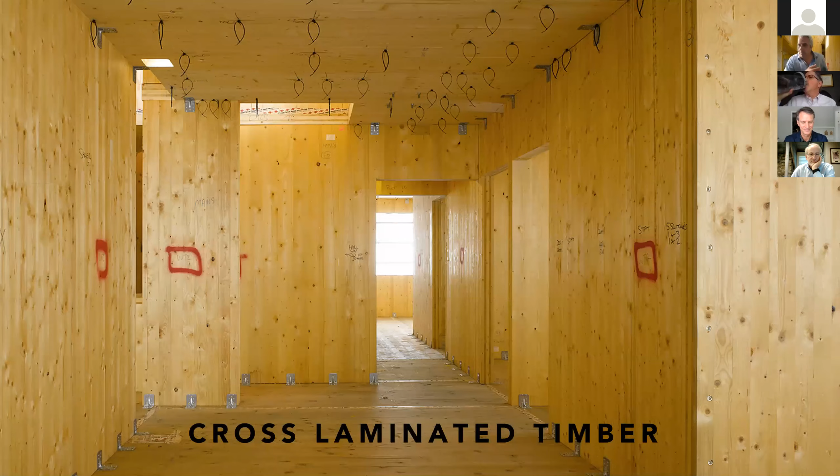We used to start with a slide like this, and thought we didn't have to do it anymore, but I realized, Dan, we've talked about it so much that we forget CLT is still very novel to a lot of people. So it does what it says on the tin: it's big boards of timber made up of planks laminated in perpendicular layers to create massive construction boards. You can see in my background a building under construction.

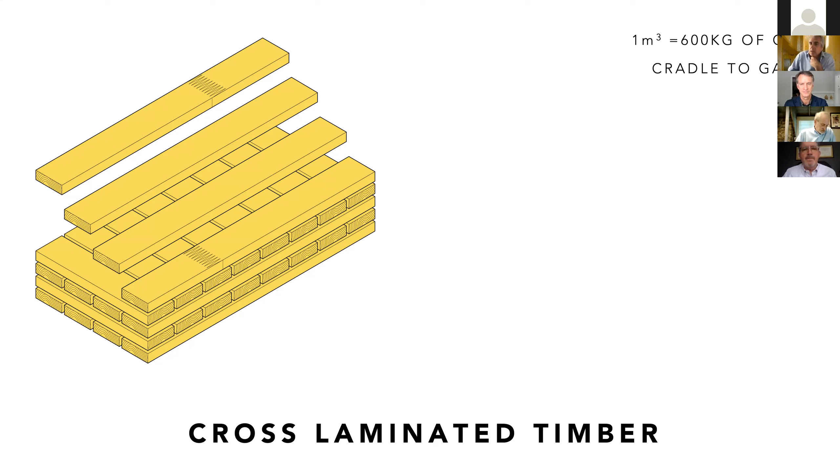And the point about it is every kilogram, every meter cubed that we use in construction, we're permanently storing 600 kilograms, a ton of CO2.

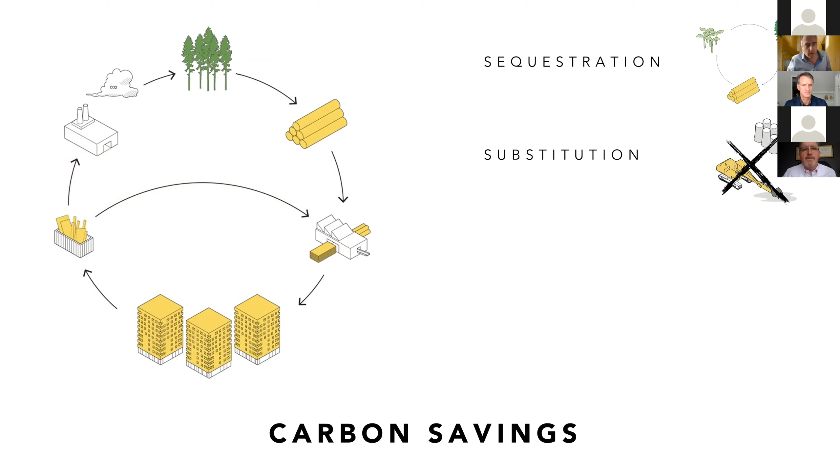This is the key driver for us: the triple carbon saving. We have the carbon absorbed during the growth of the timber, which is then harvested when the trees are matured, leaving space for more growth. It removes the need for concrete and steel, high polluting, high embodied energy materials, and more importantly, it actually drives reforestation, which most people acknowledge is one of the key ways we're going to address climate change.

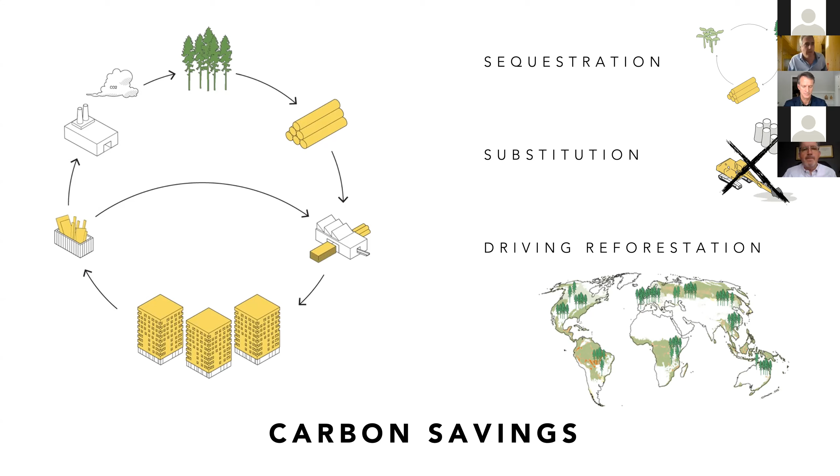A lot of the work that's been going on in buildings since the 1990s, when the issue of carbon emissions was first addressed globally in construction, has been on operational carbon, driving down the cost of heating, lighting, and cooling. But only very recently have we started to talk about embodied carbon, the carbon based in the structure.

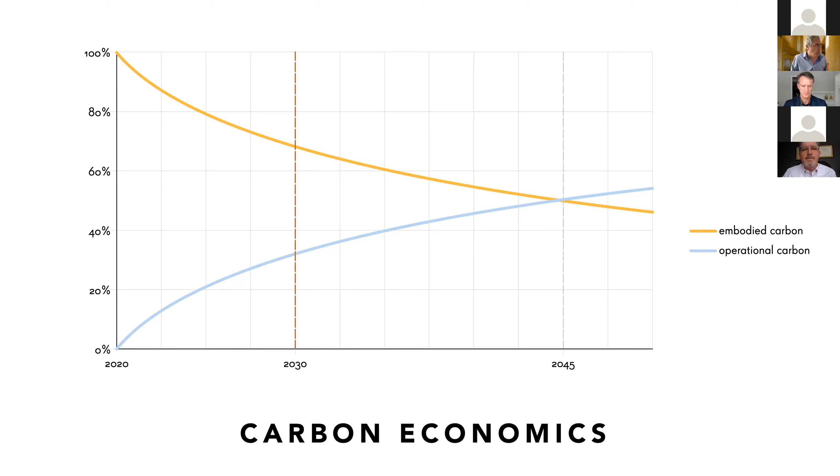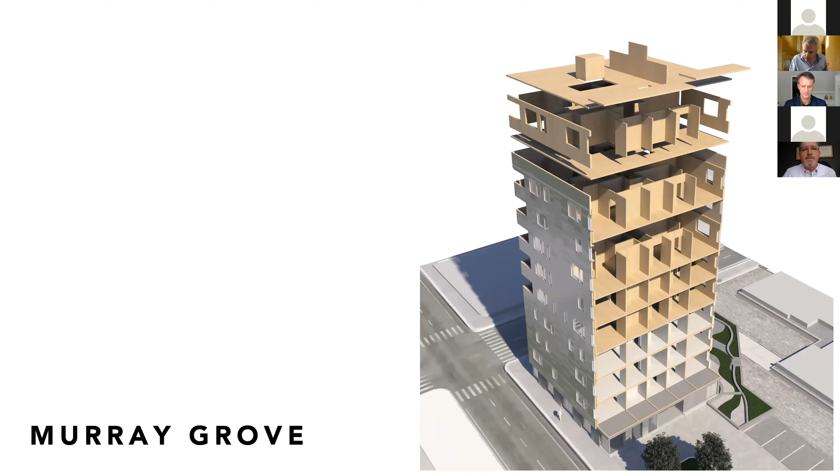As Dan said in my introduction, we stood our first CLT building in 2003, but our key work was Murray Grove, built in 2008-2009, which is the world's first tall timber building at 9 stories. The entire structure and external walls, lift cores, all constructed from CLT. This moved the material from being a niche product for schools and low-rise buildings into something that could compete globally with concrete and steel for high-density urban buildings.

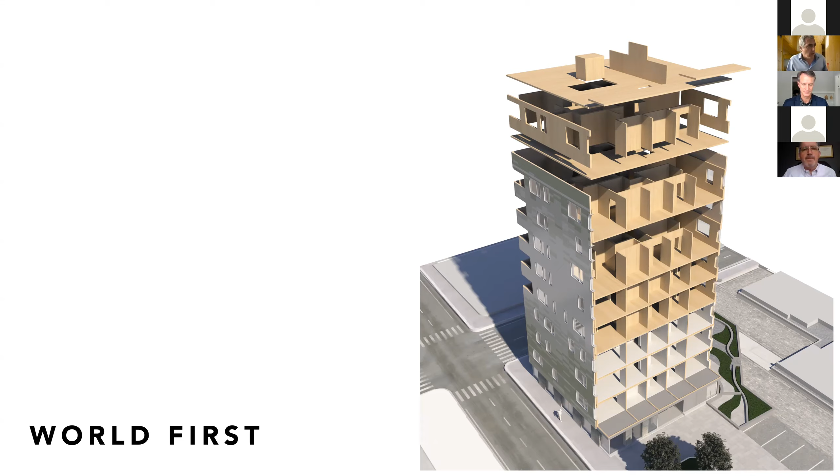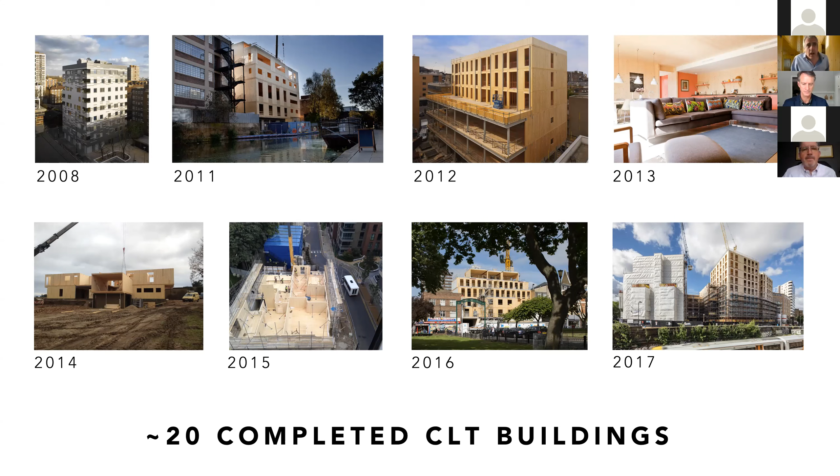Within the last 10, 12 years, we've completed about 20 other buildings of varying scales, and now have about 20 more which are at various stages on the drawing board.

We also proselytize about our work. We published a book immediately on completion of the Murray Grove project, showing how we did it, giving away all our trade secrets and the research we'd almost bankrupted ourselves making. We were paid a standard fee for the project. The only way we could convince our client to do this revolutionary building was to say we wouldn't charge him a penny more, but we probably spent about 3 times the amount of time we would have done on a traditional concrete frame solution.

More recently, a couple of years ago, we published a book of 100 projects in the UK, only 7 of which were ours, as a global marketing tool for cross-laminated timber to demonstrate its move into the mainstream. It shows a very wide array of buildings, building types and scales, and includes many top names in architecture, development and construction within the UK. In fact, this was funded by the US Department of Agriculture, the Softwood Lumber Board, in order to help promote CLT in the US. So, talking about the drivers, why we're moving towards CLT, what's been going on.

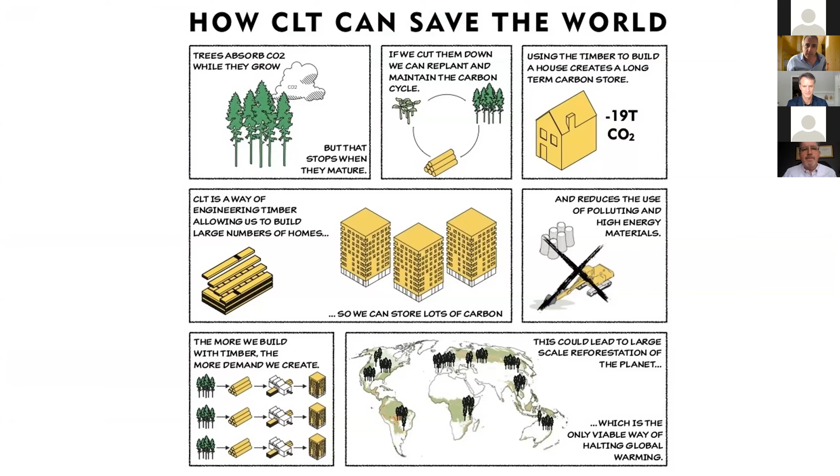One of the interesting things for us is the way we've managed to get our clients to use cross-laminated timber and become accidental eco-warriors, really by showing them the commercial benefits. In fact, the developer client for our first building, Murray Grove, said to us, 'I don't give a toss about the environment. You can build it out of rubber bands if you like, as long as it's cheaper and quicker, I'll do it.' And this is the point for us.

We've lectured a lot in the States. France is very big, it has a lot of political pressure to move towards timber building, but there's a real reluctance because in the end, and I'm not a great capitalist at heart, but in the end the financial imperative has been what's driven the adoption in the UK.

With Murray Grove, we were able to demonstrate that we could build it in two-thirds of the time. We could build it for the same price. We could use less foundations.

This building, which we completed 2 years ago, not far from the Murray Grove building, is directly above an underground railway tunnel, which meant we couldn't use concrete piles. We had to use a raft foundation, and as a result, the lightness, the reduced weight of the CLT meant we could build a 10-story building, whereas the engineers had told us in concrete that would only be 7. So our developer client got 121 units instead of something like 83. That was the argument we used for them. Again, not interested in any of the environmental benefits, it was the quicker, cheaper, more that won it for them.

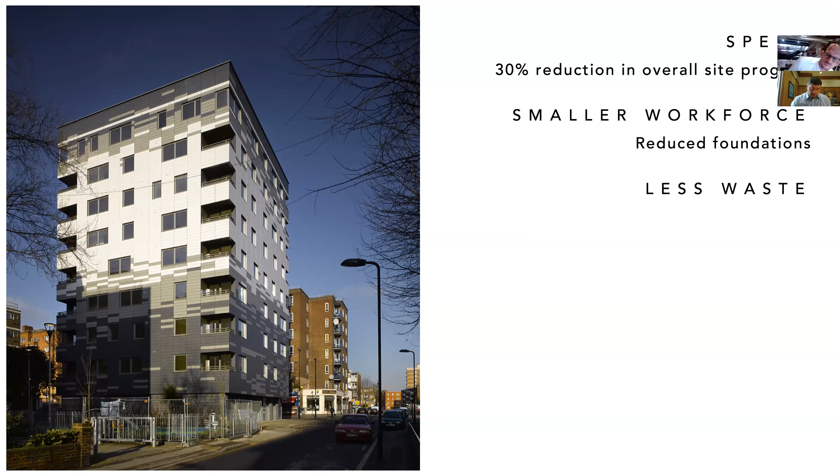This is the reason why a lot of our clients will use the material. But one of the other key drivers we're very excited about, which particularly plays into our post-COVID world, is health and well-being, which we were already talking about before the pandemic, and now becomes right at the top of the agenda.

In the aftermath of the Spanish flu, the emergence of the Bauhaus and modernism were things that were already brewing, but were kick-started by this need for clean lines and a new understanding of how disease is caused, and that it's much easier to clean in simple, clean, crisp surfaces.

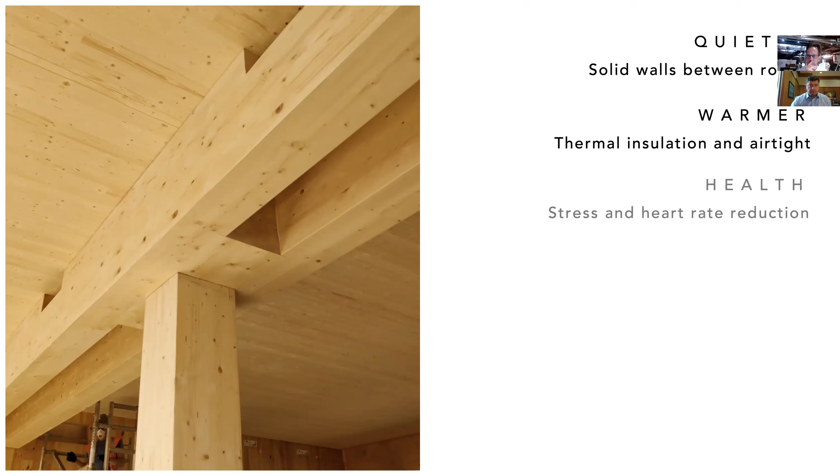Again, it's more subtle. We understand more about medical issues anyway, but that health and well-being, the biophilia, the need for natural materials — we're getting more and more understanding of the benefits of living and working in timber, in terms of lower heart rates, better health, and less stress.

I won't go through all of this, but the slides will be distributed afterwards, and you can see that all of these points show now that there's lower absenteeism in offices. Health outcomes in hospitals which have a large amount of timber in them are much better. We have people recover quicker, with less lying in bed recovery time. In schools, there's less stress.

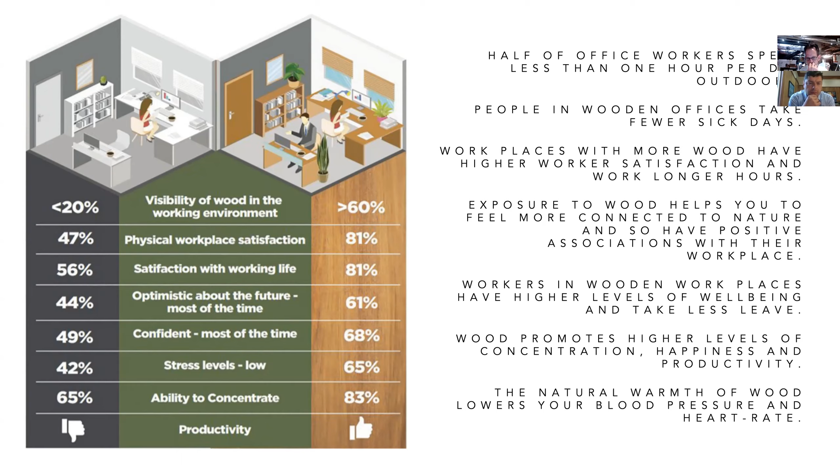There's a school near our office in Hackney that we didn't build, but was built in CLT for autistic children, and the head has said that the behavior of the children is remarkably improved by the timber structure. So this is the point I was making before.

We are now at the point of a fundamental change, and CLT and mass timber construction is very well placed to move in with all the other drivers and satisfy these needs for natural materials and cleaner, more healthy workspaces.

And for us, the real excitement is going back to the title of my slide, which was that we're talking about a construction revolution. What is the next stage? I mean, timber, or mass timber, is very much at its infancy.

Much like concrete was 100 years ago. Concrete was, of course, an ancient material used by the Romans. The new reinforcing techniques suddenly opened up a whole new field of structural possibilities. Initially, the use of it was very bespoke, and there was no consensus on any way in which you could build. Reinforcing was done with square bars, oval bars, round bars — there was no standardization, and we're now moving into that standardization. My practice is very keen to be leading that charge.

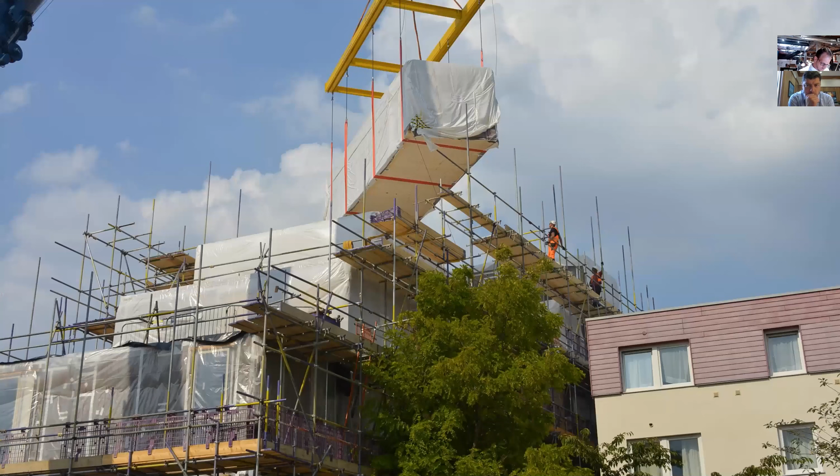Housing, modular housing, is a way of taking more of the delivery of housing into factories, to improve quality and improve cost control. Cross-laminated timber is a very good vehicle for that, because it's very rigid, very simple to construct, and very lightweight. We're just finishing our first mass apartment building using these timber boxes. We can't see inside at the moment, but they're completely pre-finished inside with wall finishes, etc.

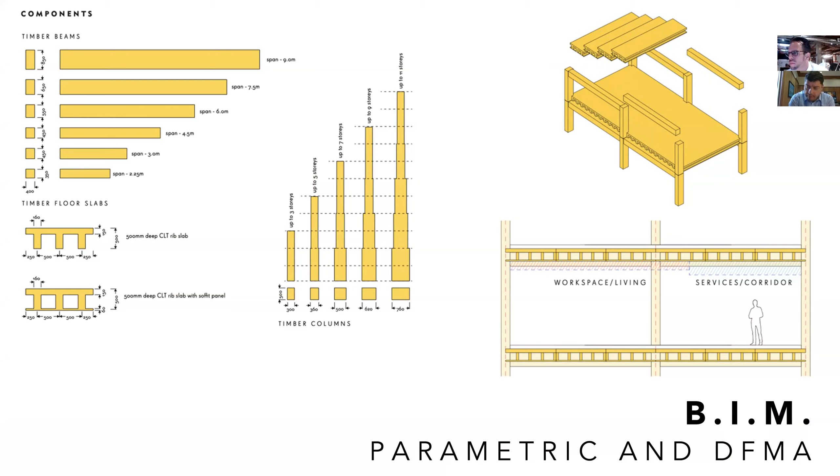And we're now moving more to building systems, actually developing — we've got 3 or 4 projects where we're developing suites of components that can be used to create building systems for the very swift erection of timber offices and timber residential buildings. These are some of the projects that are now on our drawing board.

This is an office very close to our own office, built entirely from timber. The local planning authority allowed two extra stories because of the benefits of CLT, in terms of the carbon sequestration that was offered.

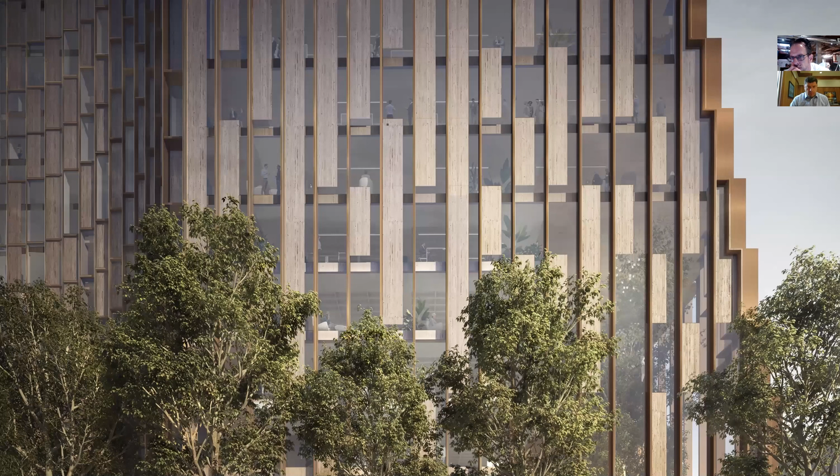We're now looking at cladding systems using timber. This is a project I'll explain more about after this slide. We now have in New York, and in a lot of world cities, concrete buildings of the 50s and 60s are now reaching the end of their life. The cost of demolition for large numbers of these is almost unthinkable, and the cost of completely refurbishing them is not necessarily justified by the capital value or the revenue value of the asset after refurbishment.

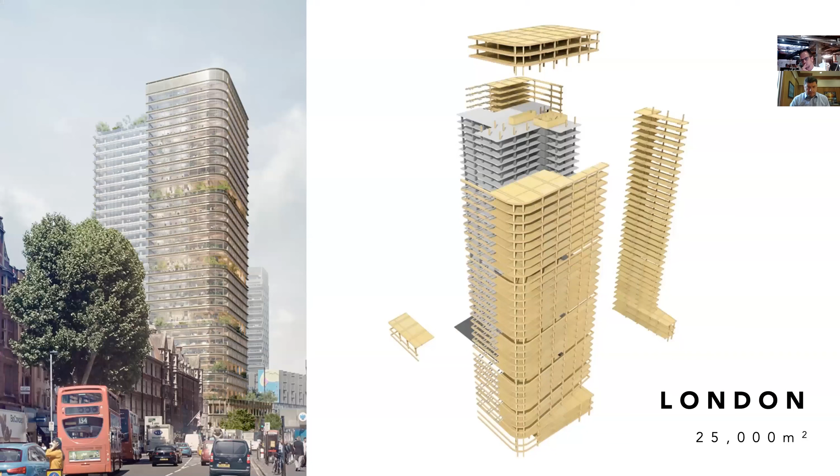So one of the projects we've been working on is a 1960s end-of-life tower in London, the Euston Tower at the top of Tottenham Court Road. We're completely remodeling the building using timber, expanding it both vertically and externally to create a more contemporary form, adding substantially to the floor space, which justifies the expense of the complete refurbishment and eliminates the need for demolition.

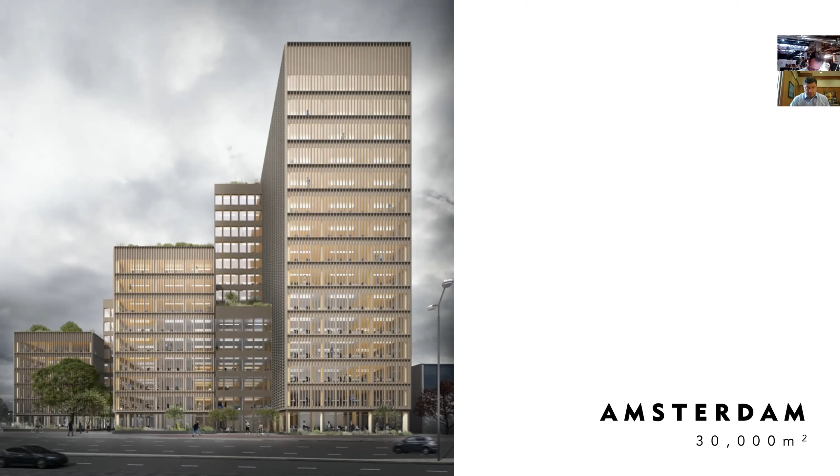I think that as an exemplar project, it's something that should be exported globally to similar buildings. This is a similar project we're doing in Amsterdam at a much earlier stage, and in Milan for Lend-Lease, a building system entirely devised for assembly. This is a component-based office system we're now producing, 100,000 square meters, effectively 1 million square feet. And at the end, this is another project up in Bergen, housing built on a lake in Norway.

I'll finish with a Latin quote. Unfortunately our current Prime Minister, who I'm not a big fan of, often quotes Latin. I'm not trying to emulate him, but this is something said by Cicero in 44 BC.

I think it speaks for itself. I know I've spoken quite fast, I've tried to fit a lot into my 20 minutes. I hope I haven't overshot.

I think that's it. Yeah, excellent job staying on time. Thank you. So I'm not sure how I unshare now. Pause share or? I think you just hit it. Right, sorry, on there, the, we go, top. I'm sorry. Yeah, there we go. Thank you.

Thank you, Anthony, it was excellent. We already have some questions, but we're going to first move to Howard and get a local take on his perspective and his experience with Georgia Tech.

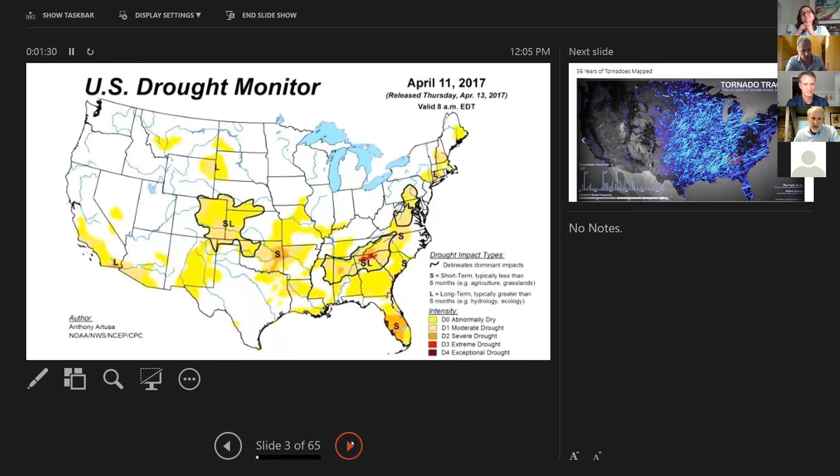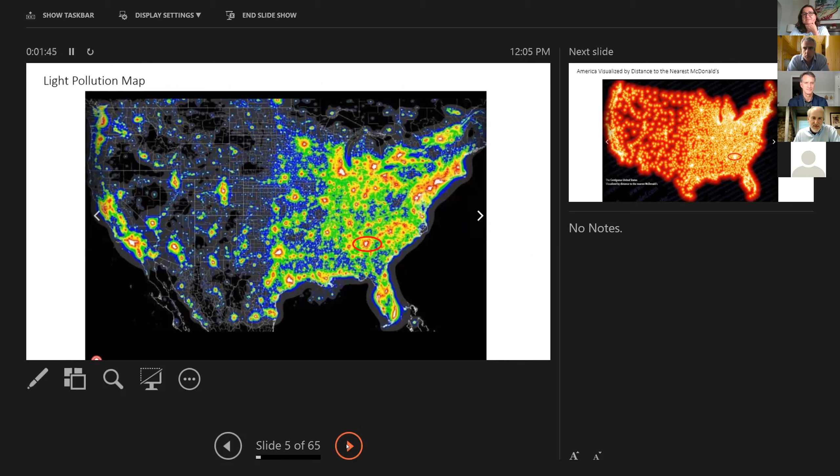So I'm looking at it from a campus development perspective. Anthony, a couple of these slides are to show you where Atlanta, Georgia is. We're in southeastern United States, there's Florida down there, and we have drought issues, issues related to climate—drought is a big issue in Atlanta. We have tornadoes, we have light pollution. Atlanta being a metropolitan area, you can see that hot spot there. And apparently there are a lot of McDonald's in Atlanta and other major cities—it's really quite amazing.

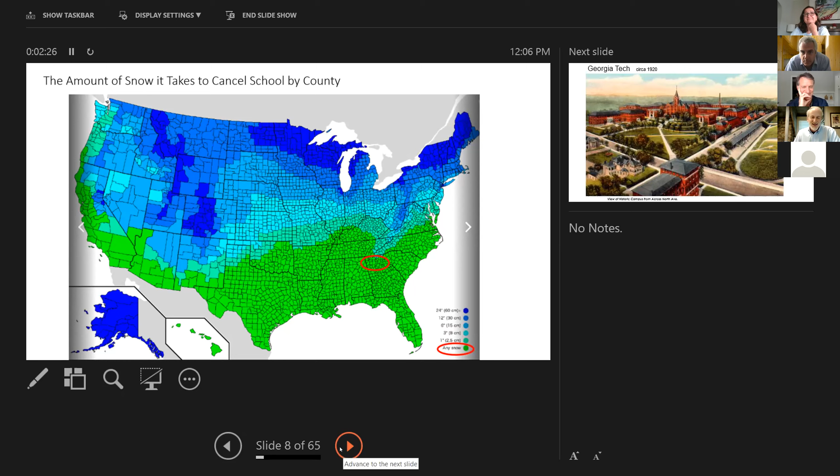As context, Georgia is a relatively happy state. We're not as happy as Montana or Wyoming, but we're more happy than other places. And then occasionally we get snow in the green zones, here's Atlanta. So any type of snow, schools are canceled. Just a little context for everybody.

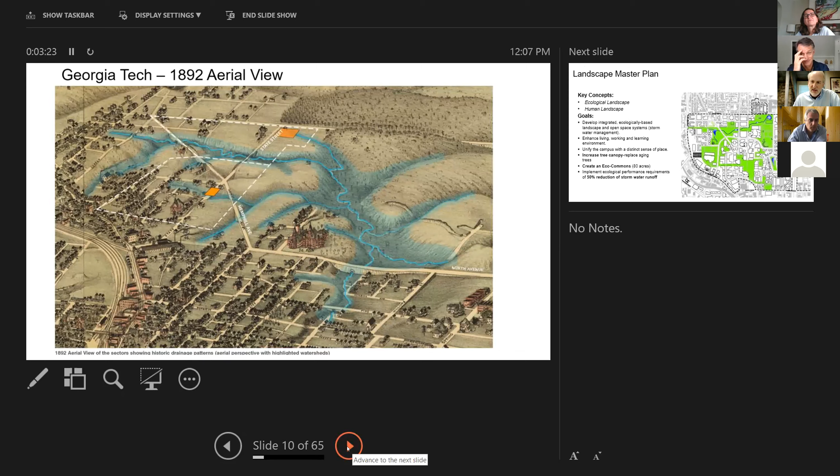These streams over time got buried in concrete pipes as development occurred on campus. When I was at Georgia Tech, we had a campus master plan, but also a standalone landscape master plan focused on the ecological and human landscapes. We created this green donut we called the Eco Commons, about 80 acres out of the campus's 400 acres. You begin to see these little blue lines where those buried streams become visible again.

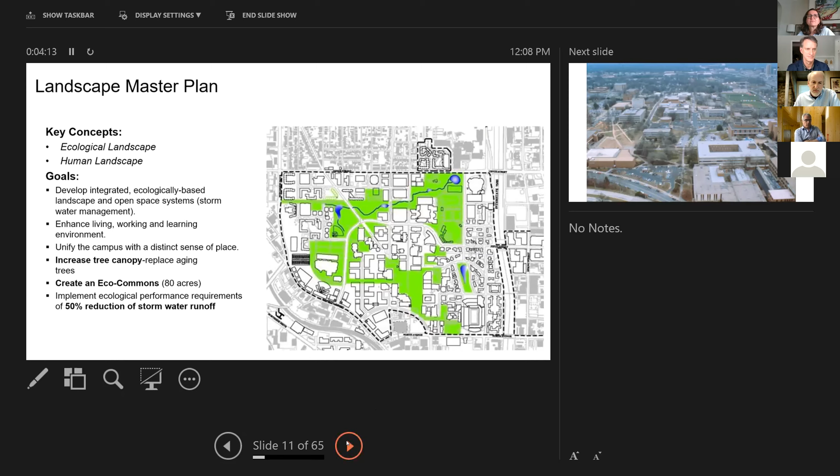In Atlanta, we have combined sewer systems, so sanitary and stormwater are all combined. It has to get treated offsite, and then it comes back out of the faucet. So how do we reduce our demand on potable water for non-potable needs, and how do we protect the river, if you will?

When I arrived at Georgia Tech, probably not too dissimilar from a lot of campuses that evolved over time, the heart of campus was asphalt. Bill and I were in grad school together, and you could park in front of any building you wanted to on campus. That wasn't really a good thing. So we revisioned what the campus could be.

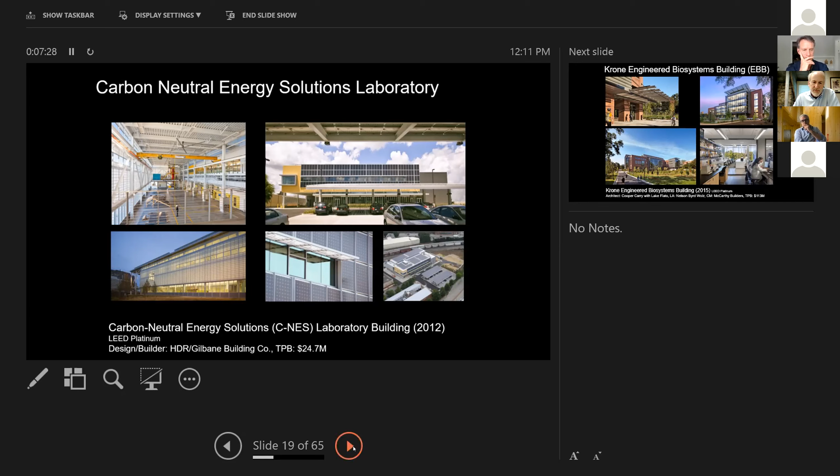Cold. I've got a cup of coffee over here if you like it. I already drink coffee, thank you. Andrew, you may want to put yourself on mute.

We developed this temporary forest in the front of the building. It's a future building site. Those trees were recently transplanted, and I'll show you where in just a moment. We replanted some new trees in that location, but access to natural light is really important.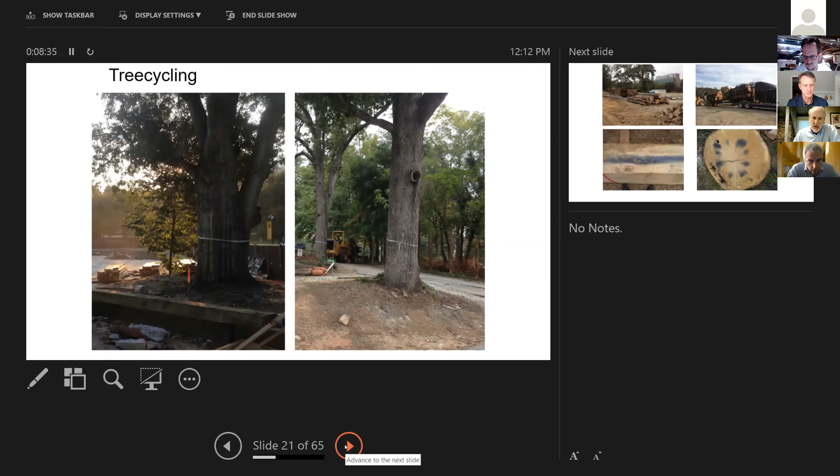One of the things that happens when you do development is sometimes you have to lose some trees. I started a tree cycling program, not only with this site but all over campus, with fallen trees through storm or disease, and had a stockpile of trees. I had some public policy students write a policy for the campus on how to tree cycle. Previously, all these trees would just get turned into wood chips and mulch, but what we did was cut down these trees, mill them, and they became the stair treads and benches in this 5-story building. So now the building tells a story about its sense of place.

Which sort of leads us to the living building at Georgia Tech. The Living Building Challenge was started by the International Living Future Institute. The whole notion behind the living building is using the metaphor of a flower and what would nature do. So it's regenerative, beautiful, it harvests all its own energy and water, it's pollution free. That's sort of the goal of the Living Building Challenge.

We were fortunate to get a gift from the Kendeda Fund of $30 million. 25 was to build the building, and another 5 once it got certified, for programming over the next 5 years. But the notion was to transform the building industry in the Southeast.

Up to this time, there were only 12 full living building certified buildings in the United States, and they were either in the Pacific Northwest or the Northeast, but not in a hot, humid climate like Atlanta. So the Kendeda Fund was looking for a partner and felt that Georgia Tech, as a habitual builder deeply committed to sustainability, would be a great partner to engage with.

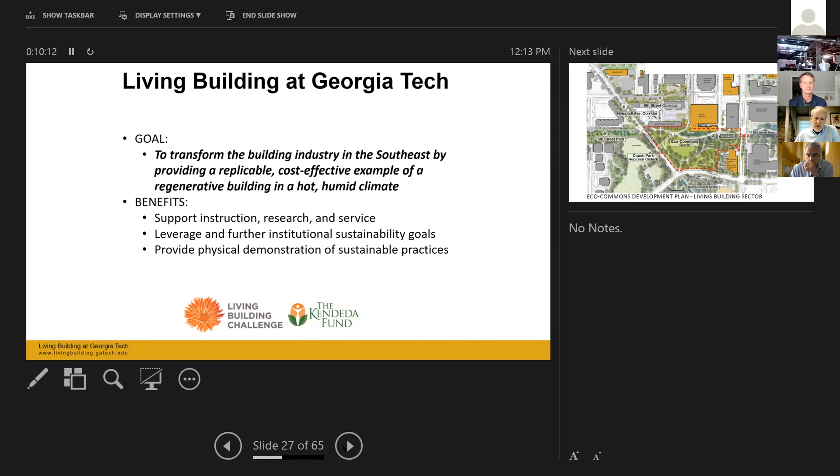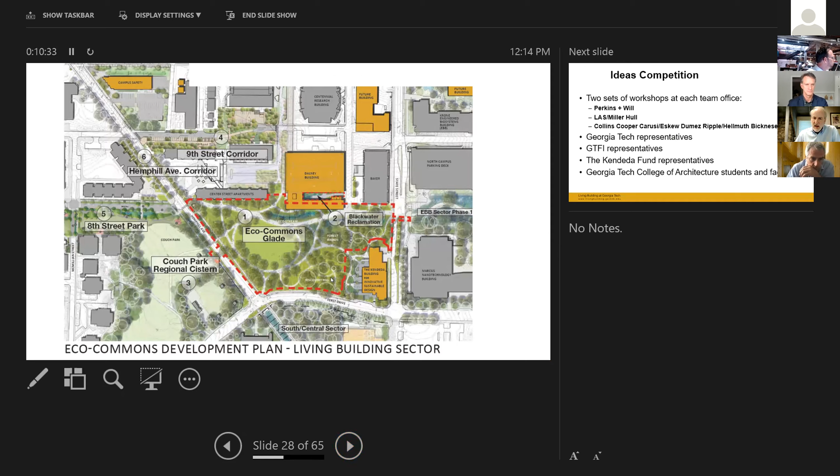So this building sits in a portion of campus that we've developed. I mentioned earlier about this Eco Commons, so this is a part of that. Here's the footprint of the living building, and you begin to see some blue lines in here, which are those waterways that are now engineered and brought forward. And we created this performance landscape.

But we had never done a living building before. We've done lots of LEED buildings, LEED Platinum buildings. So I did this ideas competition where we shortlisted 3 design teams, all of whom had members on their team who had done work on living buildings. We did an ideas competition. We had students involved. We had other representatives involved from Georgia Tech and from the donor.

And we set up these workshops over 2 days, 1 day per month over 2 months in each of the firm's offices. We wanted to see how they worked. We wanted to make sure the alpha dog architect wasn't dictating to the landscape architect or the structural engineer or the mechanical engineer or the civil engineer what is the right decision. It needed to be a very collaborative and integrated process.

And we just observed this process. We did not ask questions, nor did we answer questions, until after each round of these workshops, where we then provided written comments to all 3 teams. So we just embedded ourselves in their offices. And again, we had never done this, so we were on this learning journey as well.

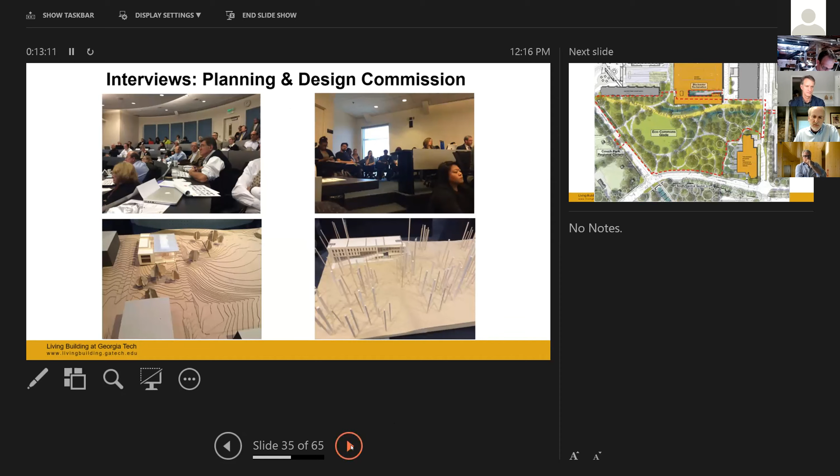But we have something at Georgia Tech called a Planning and Design Commission, which is an external advisory board that gets together once a quarter, and they're involved in the designer selection process and ongoing design review process. All of those students who were working on this project in their studio were all invited to observe the interviews, and they were all in those workshops. I know when I was in architecture school, I never got to sit in on an interview. And these students were the client to those firms. It was pretty powerful.

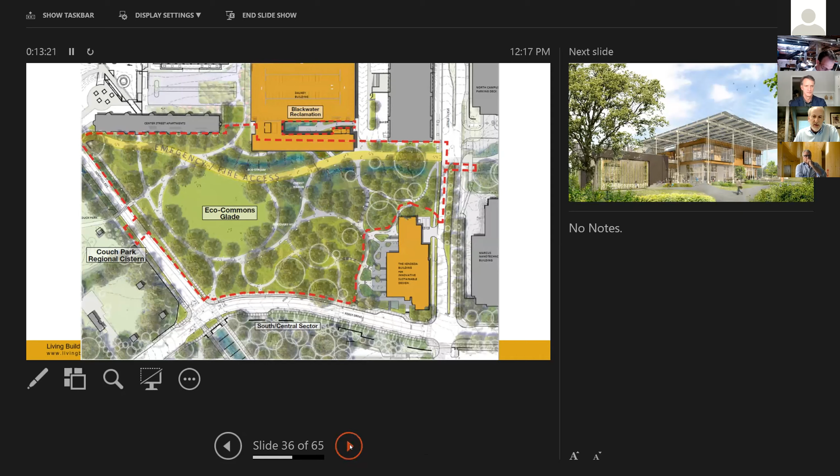So again, here we are. Here's this Eco Commons, this is about 8 acres. And here you see the Kendeda building right there. And just some visual eye candy that came out of this ideas competition and some renderings. Again, we needed to understand what the impact was.

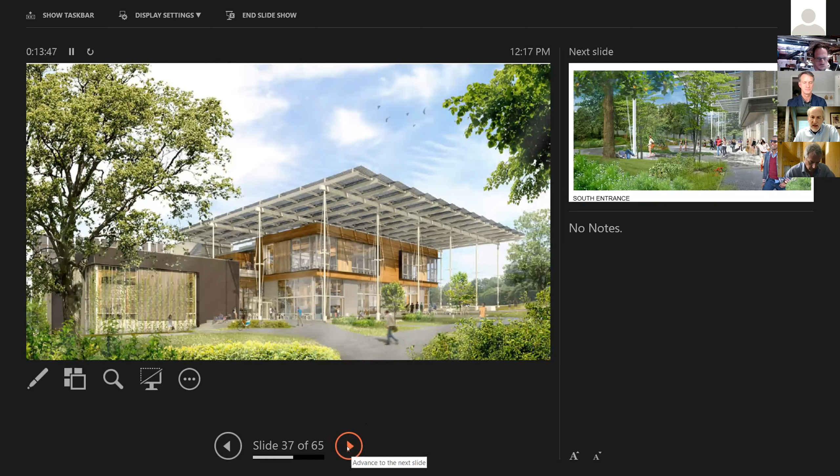This solar canopy provides all of the energy for the building, and it's net positive energy. The building is net positive water. And those are the requirements of complying with the Living Building Challenge. Some more renderings.

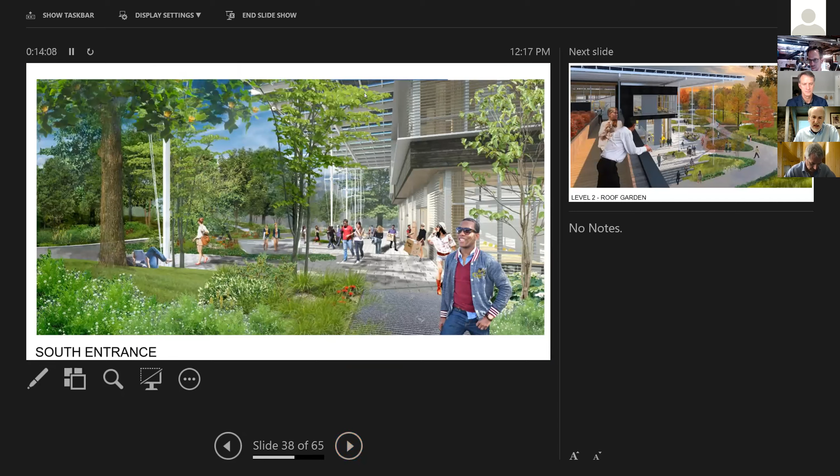In Atlanta, Georgia, having a west-facing porch isn't how you want to orient a building. We felt the orientation of this building to the Eco Commons was critically important. In the southeastern United States, porches are really communal spaces.

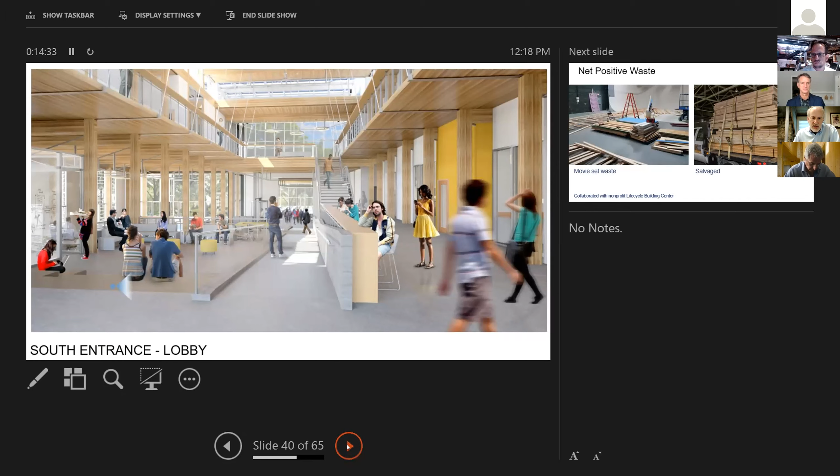In Georgia, the film industry is quite big, and normally these sets that are built, that material would just get thrown into the landfill. There's a nonprofit in Atlanta called the Lifecycle Building Center. We partnered with them to store this material for us.

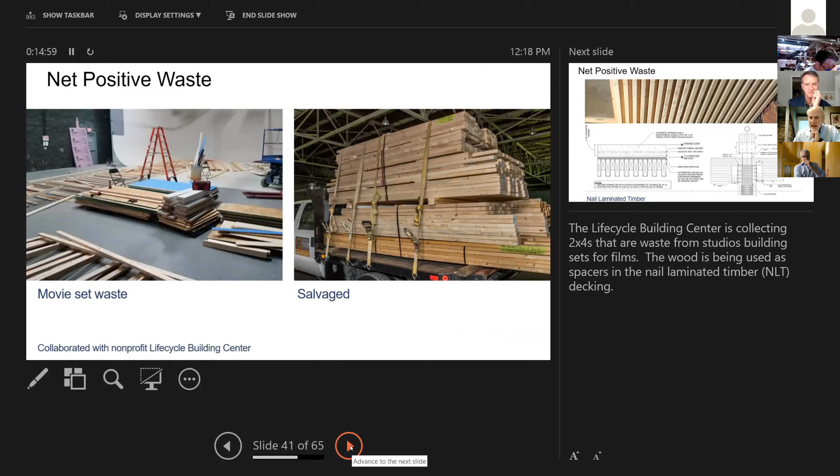So all of the 2x4s were reclaimed from these movie sets, and we built a mock-up of what that ceiling floor panel system would look like. The 2x4s are the harvested wood, but the structural engineer could not guarantee the structural integrity of those 2x4s.

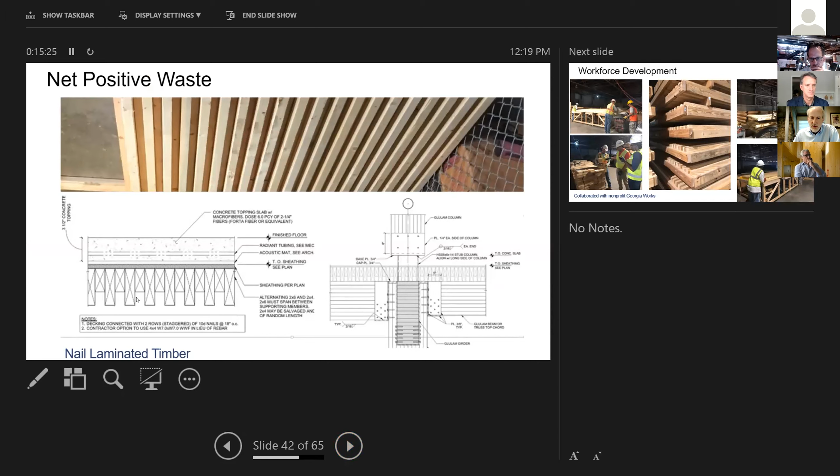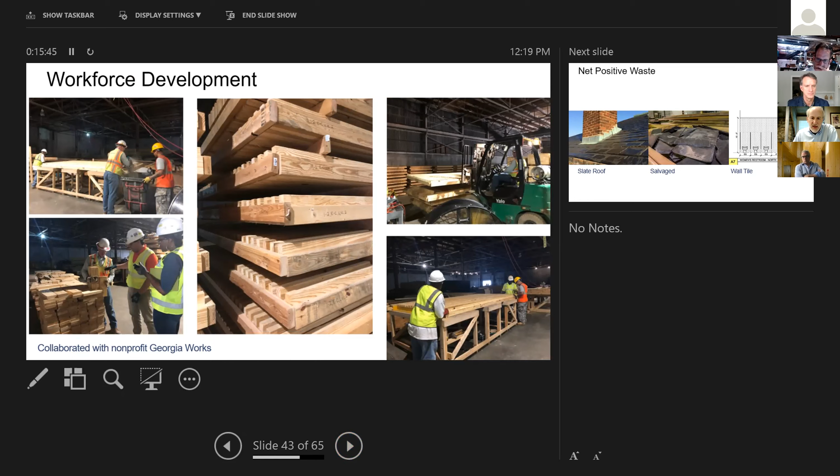So we had 2x6s of Forest Stewardship Council wood. We worked with another nonprofit for workforce development, with Skanska, the contractor, to fabricate these panels, about 5.5 feet wide and 10.5 feet long. This is just an outer wrapping on that panel so they can transport it.

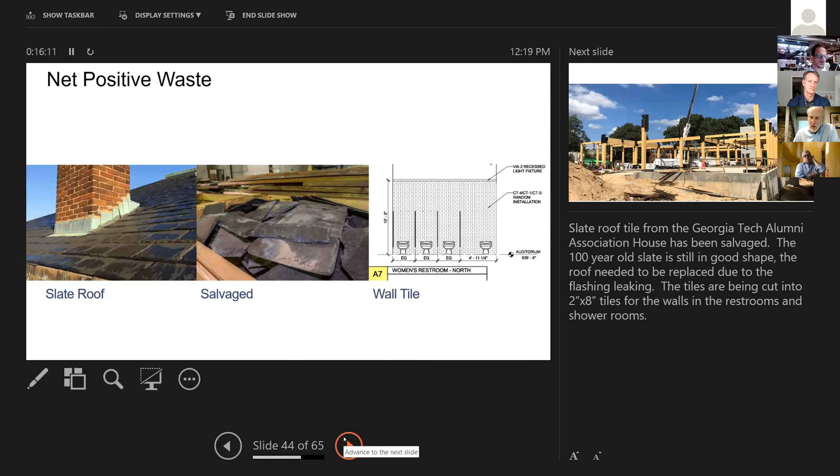Similarly, because we have 200 buildings on 400 acres, we had another project where we had to replace a slate roof. That slate was harvested and became the wet wall in the bathrooms in this building. Those bathrooms are composting toilets, using about 1 teaspoon of water per flush.

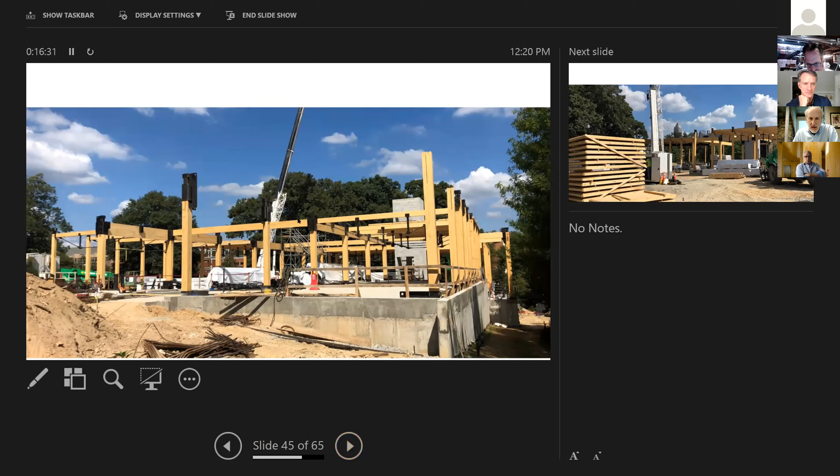Here you see some of the construction, the heavy timber column and the frame going up. It's important to note that while it's heavy timber, you do have steel connection points, and how those are detailed is critically important. Here you see those floor panels getting ready to be staged and installed.

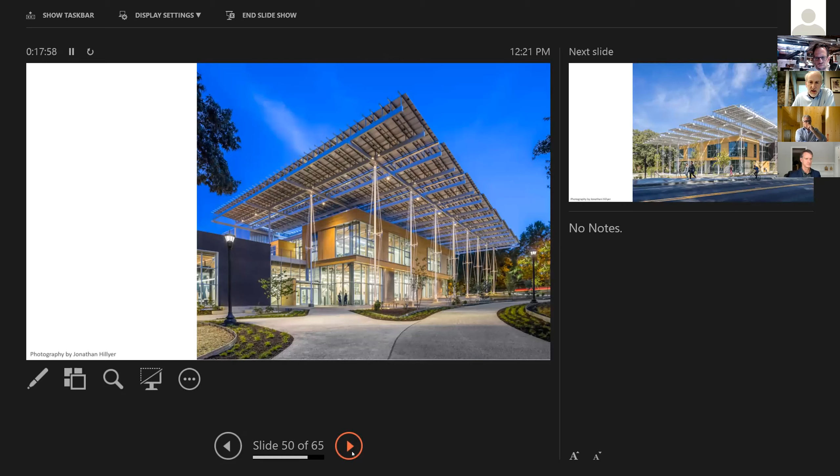A few glamour shots of the building at night and during the day - a very lightweight structure, sort of sail-like, leveraging the use of steel to make the building as light as possible. The louvers you see here - think of yourself, when you go out in the rain, you put your raincoat on the outer layer of your clothing, not the inner layer, where historically people might put window treatment on the inside. Well, you've already brought in a lot of the heat gain, and it increases the cooling loads of a building.

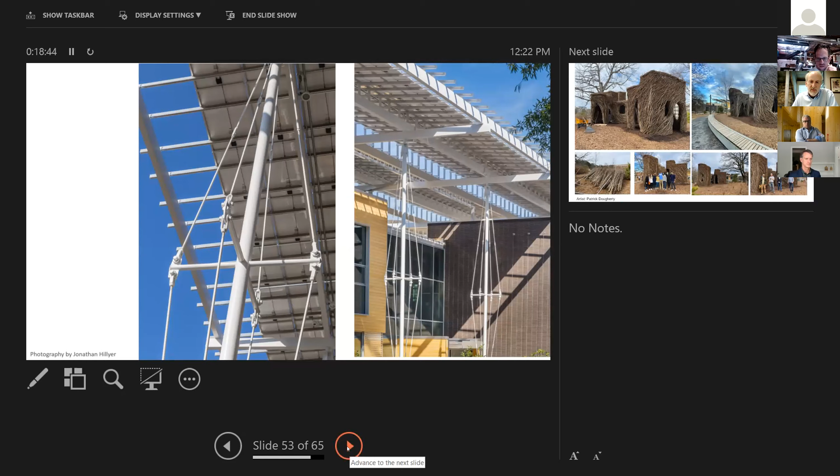The rainwater is captured from those solar panels, goes to these gutters, and there's a 50,000 gallon cistern that harvests that water. We worked with the Environmental Protection Division to turn rainwater into potable water, which hadn't been done in Georgia before.

Part of the project, I set up the budget where 0.5% of the construction budget was for public art, again going on the same regenerative theme. This is an artist from North Carolina, his name is Patrick Dougherty. If you Google stick work, you can see his work.

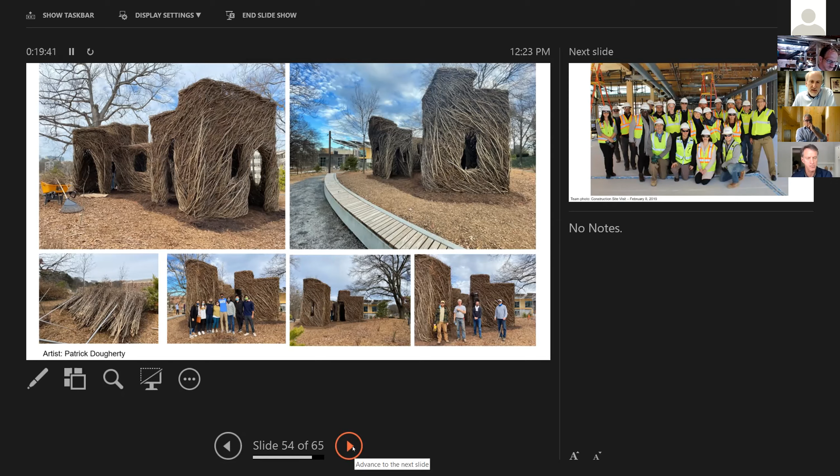He got volunteers - I was out there for 3 days with him, primarily him and his son who were down here, and they fabricated this structure. They do these things all over the world. All of this material was harvested from a place called Serenbe, about an hour south of Atlanta. It's ephemeral, a short-lived piece, but it's really quite beautiful and very sustainable.

Then, when we were under construction - this is the donor, Diana Blank. Those of you from Atlanta know Arthur Blank, so that's Arthur Blank's first wife. Kendeda is their 3 children, Kenny, Dina, Diana - that's Dina right there, so that's how Kendeda came about.

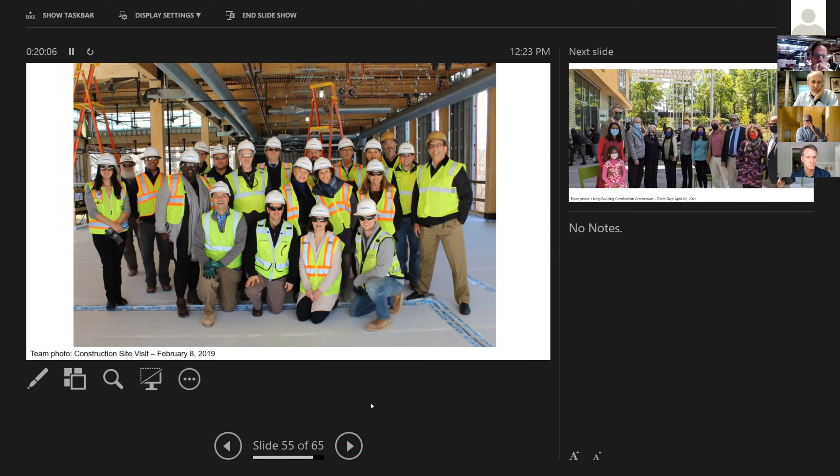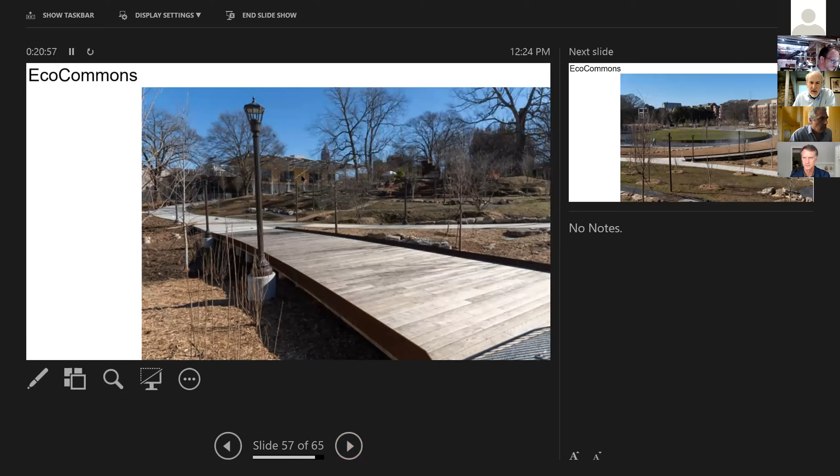Here's some of the EcoCommons, with the Kendeda building in the background. That piece of sculpture is back here. This is a performance landscape that will ultimately have a blackwater reclamation component, where we extract water from the combined sewer system, treat it, and serve a central plant a couple blocks away, saving about 50 million gallons of potable water per year. During rain events, rather than the water being put in a pipe and thrown into the combined sewer system, it becomes visually exposed — a research, educational, and recreational amenity for the campus community.